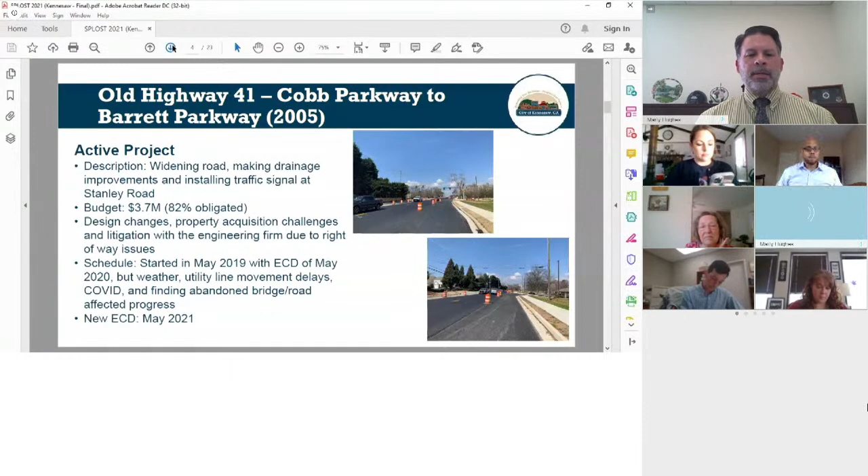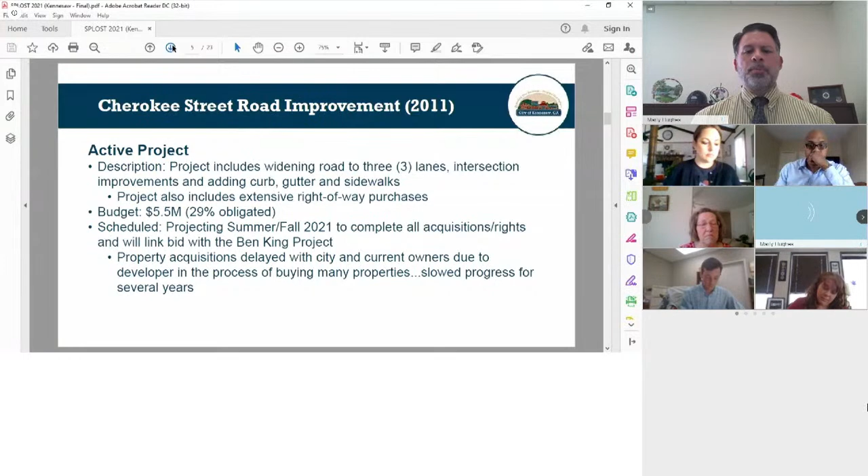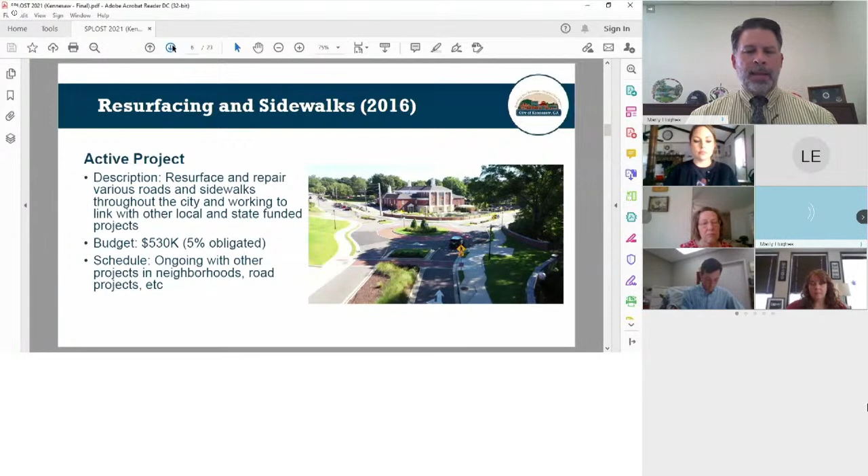Resurfacing and sidewalk part of our SPLOST. Again, we're using this in particular to offset other projects we have going on, specifically in the neighborhoods, as we try to do a lot of repair work for the roads and sidewalks. We're also trying to continue combining our dollars to get the best value we can as we see prices continue to rise. Next slide.

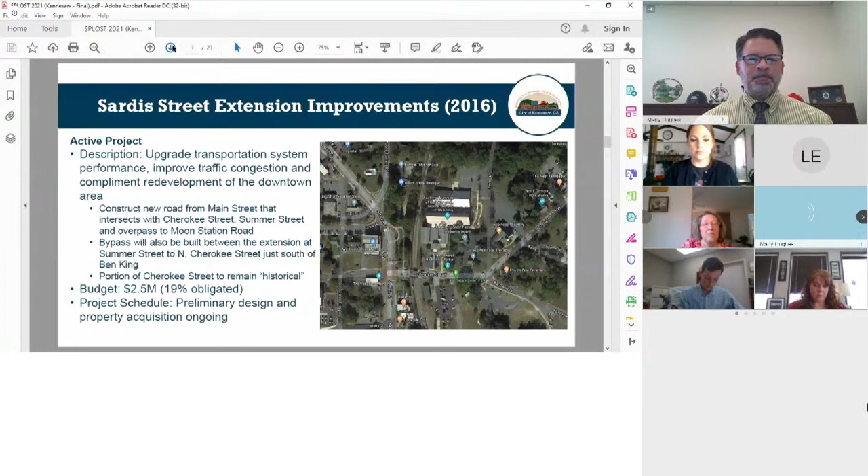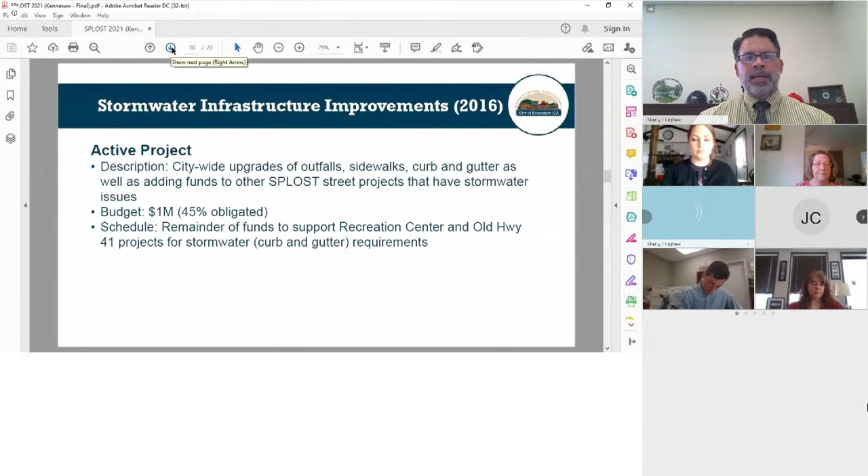Next slide. The auxiliary lane, the stormwater infrastructure there - this is stuff that we're continuing to add funds to for our recreation center, that's going up, and I'll talk more about that later. And the old Highway 41, as we continue to do some more stormwater, that curb and gutter. It's allowing us to really address some of those issues that we're dealing with progress. And as we look to expand those projects, we're allowed to work through that process of coming through the stormwater aspect and addressing both projects at the same time with existing projects.

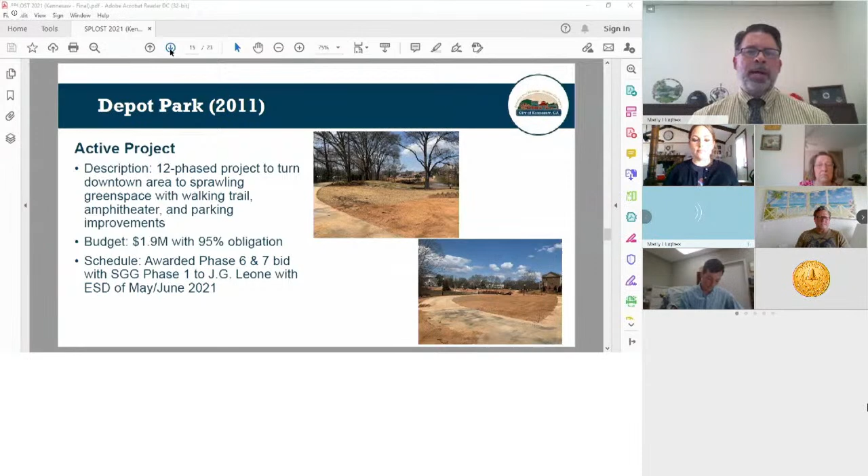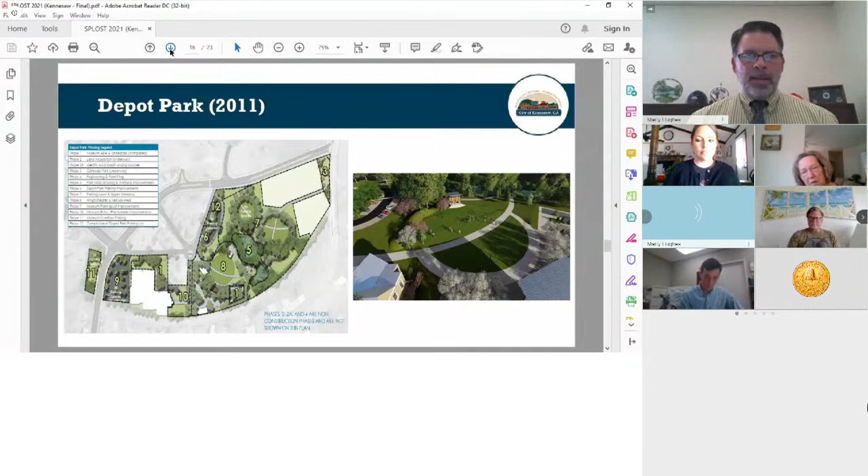We have linked this project with the Smith-Gilbert Gardens Phase 1 under one contract, which once again allowed us to save taxpayer dollars. Next slide. This is actually something I wanted to share with the committee. This is the 12 phases on your left, and the picture on your right is the conceptual design of our amphitheater. So again, making significant progress for our downtown using taxpayer dollars, which is wonderful. Getting a lot of great feedback for our Depot Park as people are seeing that really evolving over the last several months. Next slide, please.

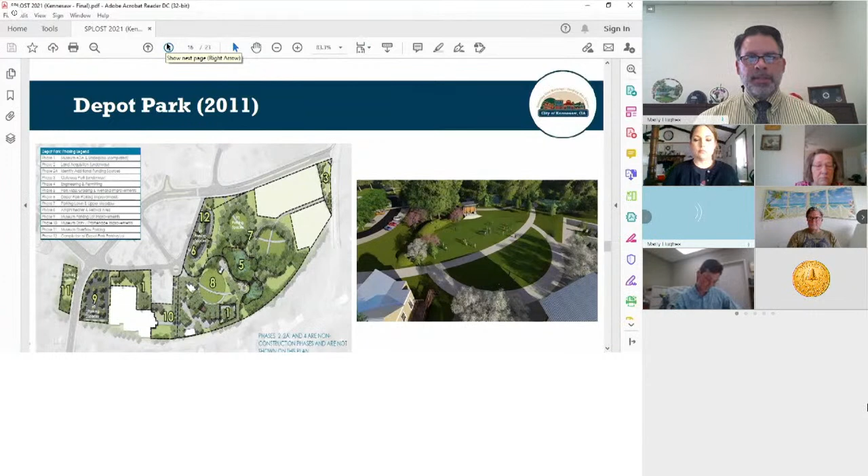We're actually now working on upgrading our dog park, trying to make it a little more level and getting rid of some of those areas that, with all the rain we get, turn into more of a mud pit than anything else.

We're also improving our pocket parks. That's been a multi-year process as we go through all of our different neighborhoods improving the swings, the slides, and everything that comes with our pocket parks. We're about 82% obligated in that budget, but we have some things that will probably quickly expedite those expenditures over the next several months.

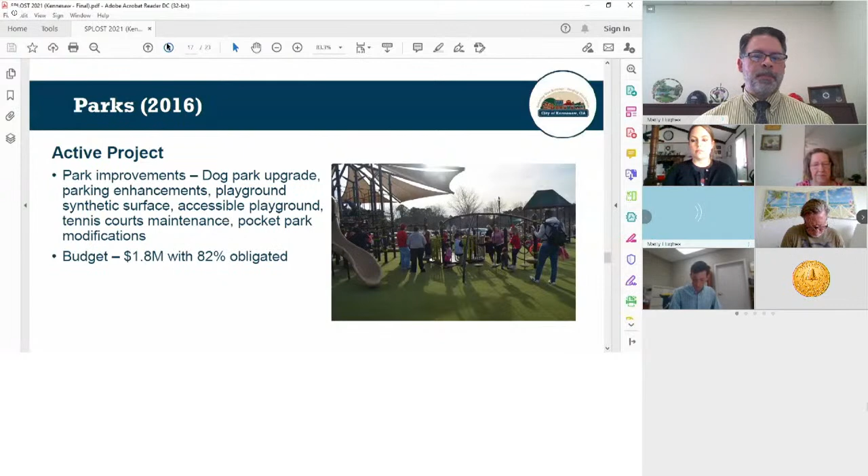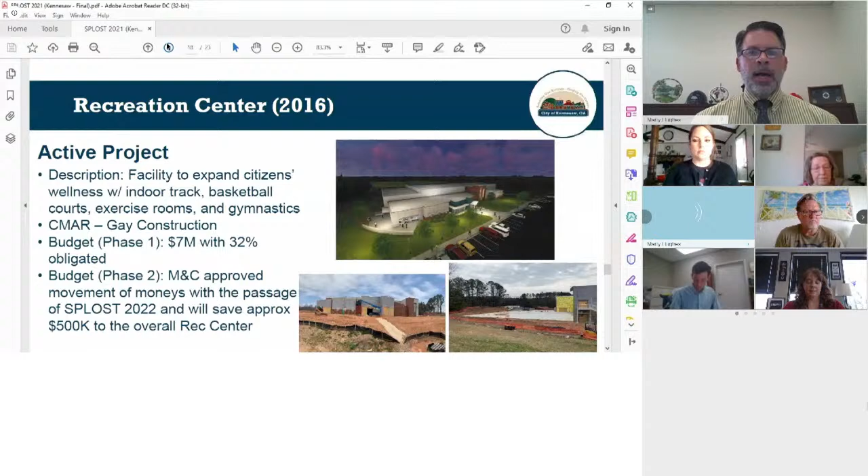For the Smith-Gilbert Gardens for 2011, I'm pleased to say that we are 100% obligated for that budget line item.

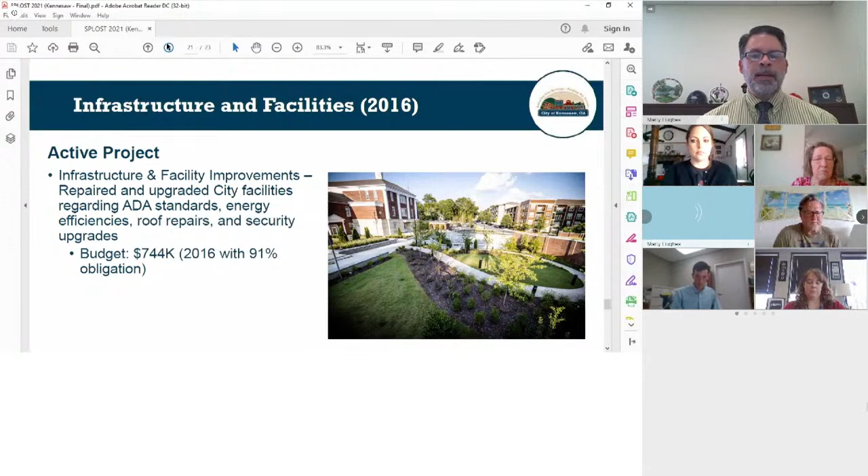The last part is our property acquisition and economic development. We're at 45% obligated. Those dollars are going to work in conjunction with Depot Park and Smith Gilbert Gardens, but we've also used other dollars for road widening and other general economic development opportunities. Again, great progress in how staff is using these dollars wisely and to the most impact for our community.

And last slide. I'd be glad to take any questions.

Hey Marty, this is Jay. The Sardis Road or Sardis Street thing, as far as the railroad's involvement, the timelines were super vague. Are you able to add something like 3 to 5 years or 1 to 3 years? We will, once we get more information from CSX Railroad, definitely notify the committee and get that word out as we make progress. I was going to throw something out there, but didn't want to arbitrarily throw a number because working with a railroad can be quite a challenge. Yeah, so it's all sort of up to the communication and quickness they choose to respond, right? Exactly. Okay, alright.

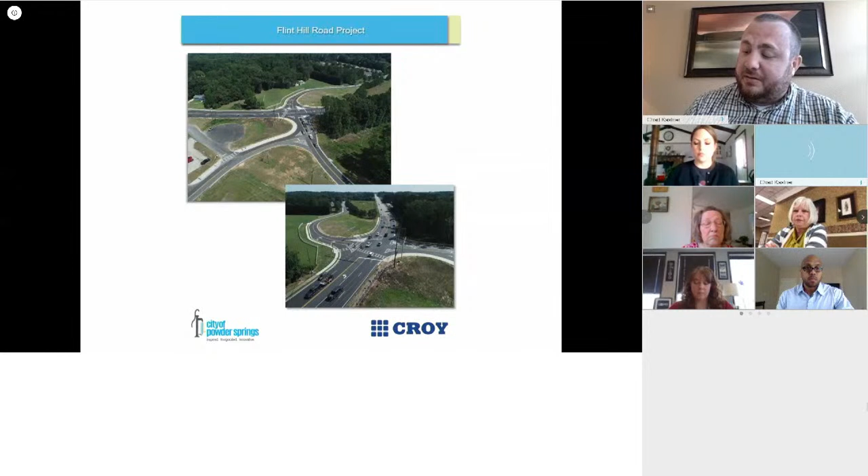Our resurfacing program - we do between $750,000 and $1 million a year in resurfacing. These are some of the roads we've completed, and then we have our proposed resurfacing project list, which is currently out to bid for this year. We're hoping to award that next month and start paving into May, beginning of June.

Next is Broad Street. This was an area in our downtown historical area that needed some attention. We went in there, put in sidewalks, redid the entire road down to the dirt and came back up, got more parking spaces in there, made it ADA accessible, and really opened that up for the businesses. That project is in punch list right now, so we'll probably have it closed out in the next 30 to 60 days, and that price tag was $267,000.

Next, this is the intersection improvement project at Florence Road. This project is currently at GDOT getting an encroachment permit. As soon as we get it, it'll be out to bid. This is realigning the road, trying to take some of those areas that have been done during all the development phases and making it more uniform and more drivable. It's also extending the turning lane off of Florence Road onto 278 to allow for more capacity.

This is a project we're currently working with Cobb County. It's a city project, but Cobb County has been working very hard with us to come up with some solutions. We have an intersection with a lot of safety issues - we've had some pretty bad wrecks there at Powder Springs Road, Sailors Parkway, and Flint Hill Road. The current option we're working on is to tie to 2 developments down the road and put in an interparcel access road and allow a light there to try to have more people use that and get them off of making that dangerous turn right at the intersection.

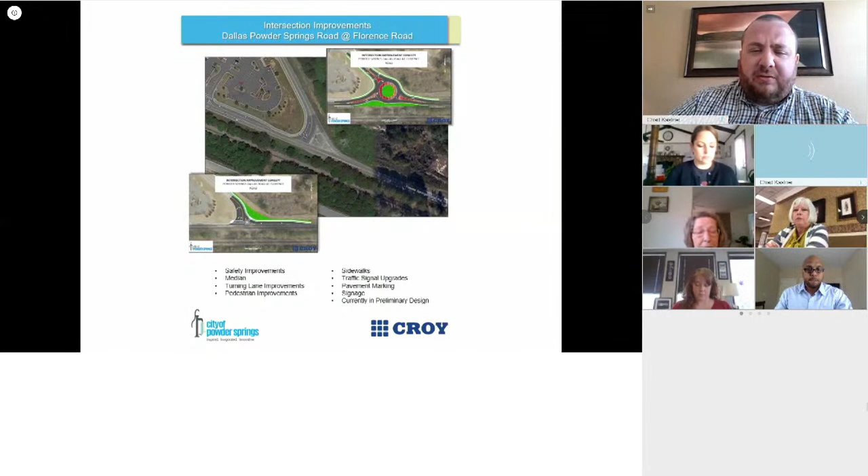The Brownsville Road improvements, from Hiram Lithia Springs Road to 278. This takes into account all the development that has happened through the years, realigning the road to make everything flow correctly, allow for the correct turning lanes, and make that area more of a corridor into the city, with sidewalks, drainage, and beautification. This project is currently in design and should be going to GDOT in the next 30 to 60 days for an encroachment permit.

Next, you will see our financials for this. We've done pretty well. Our total expenses to date have been $10,298,613.62, and our total budget is $15,810,837.89.

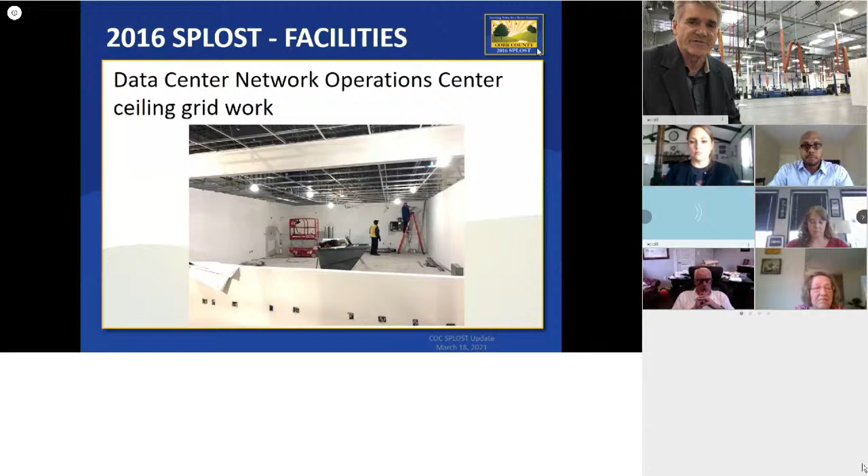Next slide, this will be the white room. This room will actually house all the computers for the data center for the county. Everything will run through this room right here. It seems small to be able to manage that much data, but out back will be all the HVAC equipment to keep the equipment cool.

That's it, if you have any questions. Any questions regarding facilities? Any of these projects you would like to go on-site and look at, please give me a call, email me, and we'll set up a time to get you into the facility. Thank you so much.

So if there's no questions for facilities, we will move on to public safety and Randy Kreider. Hello, everyone. For those of you who don't know me, I'm Randy Kreider, the Director of Public Safety, and I'm going to give you an update of where we are with the projects within public safety.

As you can see on this list, the number of projects that were in the SPLOST, we've completed a large majority of them. I'll give you an update on the ones we have not completed yet. I think there may be more slides.

So the completed projects, as you can see, there's the command unit, there's an airport firefighting apparatus. You see fire station number 1, which is down on Mableton Parkway. And you also see some animal services vans that we replaced.

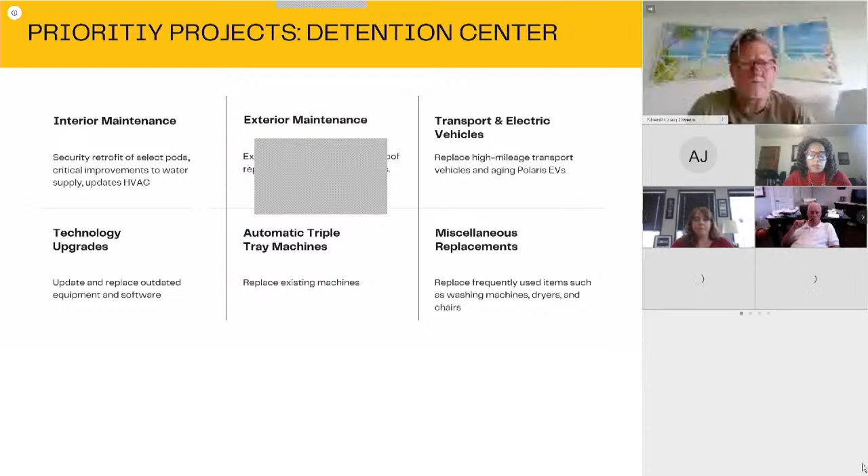One of the key things for an organization to be efficient and adaptive is to have the necessary technology and ensure that it keeps up with the operational environment that we're responsible for and deal with on a daily basis. When you look at the priority projects for the detention center, you'll find that the majority of SPLOST money is dedicated to interior and exterior maintenance.

When you talk about interior maintenance, you've got the security retrofit of select pods, which goes back to priority number one of keeping the detainees and deputies who work in detainee operations safe. Not only are we looking at that safety mechanism from a security standpoint, but we want to make sure we care for the welfare of individuals in our custody and keep them as comfortable as possible.

So some of the improvements are to the water supply and updating the heating and air conditioning system there.

Exterior maintenance includes the roof, fencing, signage, and lights. This is very important because as a jail, not only internally but externally, we have to ensure the area is well lit, which is a safety concern we address not only for the employees who work here, but also for the public who come on the premises to do business or visit loved ones here at the jail.

Transport and electric vehicles. When we look at our transport vehicles, they have very high mileage. Certainly, we don't want to be transporting individuals in custody and have our transport vehicle break down, so we're looking at replacing them with newer transport vehicles.